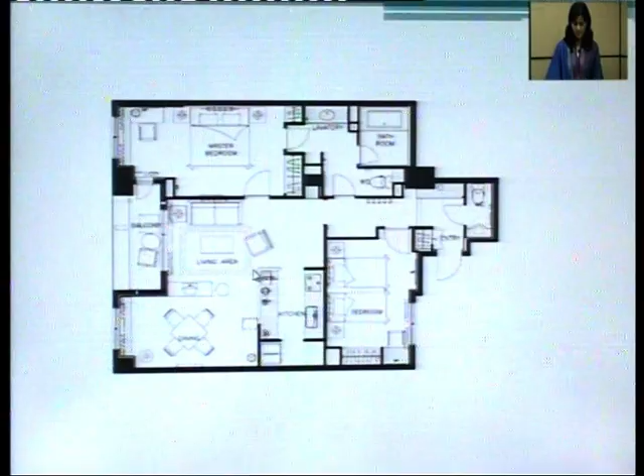Now, planning of a house. A house can be divided into 3 major areas. These areas are the living area, sleeping area, and the service area. For example, if we consider the same plan, this is the main service area, this kitchen and this dining room, and this is the main sleeping area, these 2 bedrooms, and this living area is the main living room.

Now we will discuss the living area. This area is for general use. Hence, the living and drawing room should be planned near the entrance of a house. It should be planned taking into view some considerations. Some considerations are required for the design of a living area.

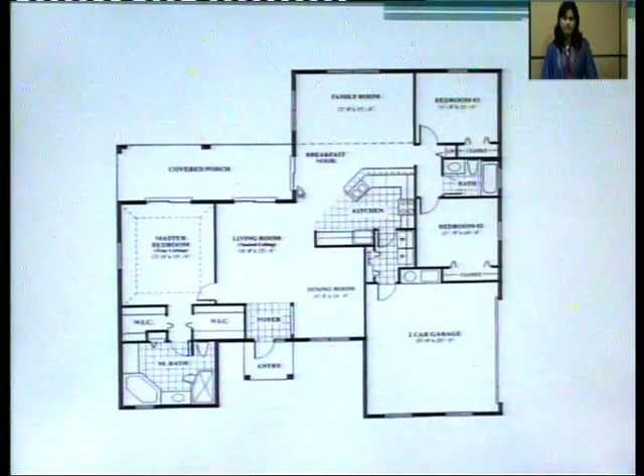Now next comes the sleeping area. This area provides bedrooms for sleeping and relaxing. Bedrooms may be with attached or detached toilets. Their size depends upon the number of beds. If we have to provide a king size bed, then the room size should be comparatively larger, and if a queen size bed is provided, then we can use a smaller bedroom also.

They should be located so as to give privacy to its users. They should have a northwest and southwest aspect. It means these should be provided either in the northwest corner or in the southwest corner of a house. This is a typical bedroom.

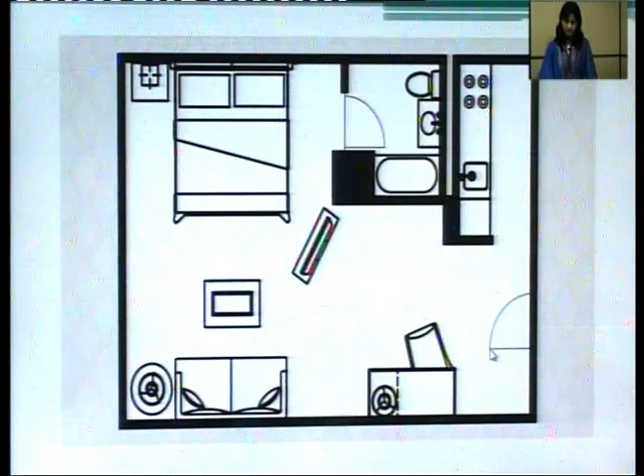Now next comes the service area. Service area includes kitchen, dining area, bathrooms and WCs. All these areas come in the service area.

Kitchen: it may be adjacent to the dining room or may be separate. A dining room can be attached to a kitchen or it can be a separate kitchen. If a separate kitchen is provided, it will have walls and is enclosed, and these days the open kitchen concept is very common, and it should be attached to a dining room so that one counter worktop can act as a breakfast nook for the users.

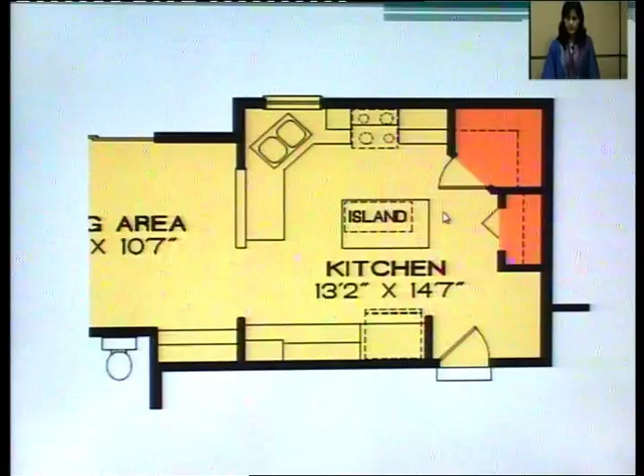Now next comes the bath and WC. Bath and WC should be approachable from all the rooms, meaning they should not be provided either at the front or at the back side. In fact, they should be easily approachable from all the rooms, whether it is a drawing room, dining room, bedroom or any other area. Dados or glazed tiles should be provided on the walls. Dado means the area up to the door level. Here tiles should be provided.

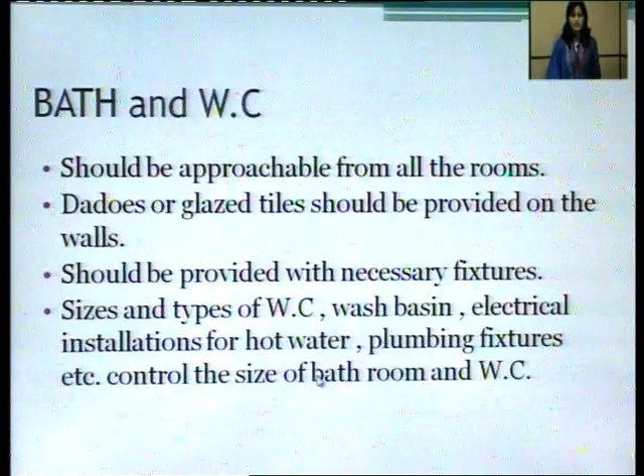Bathrooms should be provided with necessary fixtures: sizes and types of WCs, wash basins, electrical installations for hot water, and plumbing fixtures, which control the size of the bathroom or WC. The size of a toilet depends upon the size and type of WC used, and the wash basin, whether it is counter type or pedestal type; whatever type of wash basin we are using, it affects the size of a bathroom or toilet.

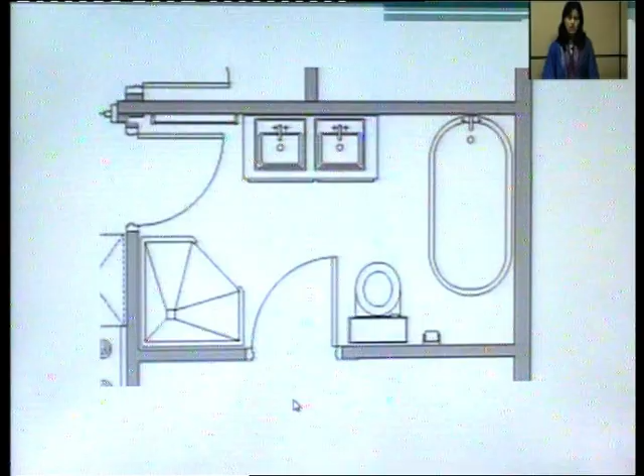If we consider the plan of a toilet, this is the main bathing area, the bathtub is provided over here, and if we segregate it, this comes under the dry toilet area and this is the wet area of the toilet, and this is the steam room which is provided in the nook here. This toilet is attached to two rooms: from this side to the master bedroom and from this side to the lobby area or family room.

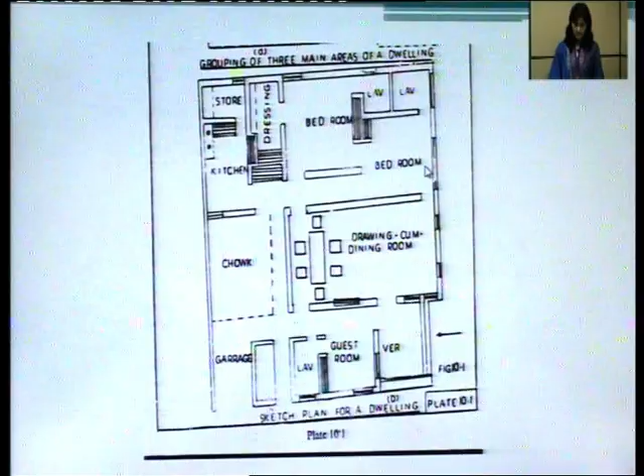If we consider this plan, the main living area is provided by these horizontal lines. As you can see here in the previous plan, this is the drawing cum dining room which comes under this living area, and then the sleeping area where bedrooms are provided. Both bedrooms are provided here, so this area is considered under the sleeping area.

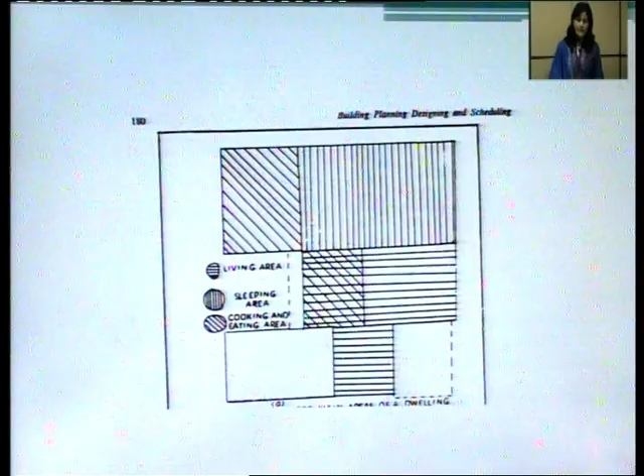Diagonal lines are provided over here. Here the kitchen is provided and here the dining table is provided. So this area acts both as a living area as well as a cooking or eating area, meaning service area. Now, functional planning and circulation.

All the areas are designed taking into consideration the purpose for which each room will be used. The purpose decides the placing and size of windows and furniture, and this is true in the design of all the spaces. All rooms are grouped together by means of a passage, lobby, staircase, etc.

All these areas come under the circulation area. The circulation area should be as small as possible and at the same time well ventilated and lighted. While planning, the architect is supposed to use judgment in fulfilling the needs of the owner with due consideration to economy, rules and regulations, customs, and types of family and their needs.

Now here comes the various areas in a house, meaning all the typical requirements of a particular house. All types of houses, whether it is a farmhouse, a small house, detached house, attached house, or balcony type houses, bungalows, should all have a drawing room, dining room, bedroom, dressing room, toilets, storeroom, and the puja room. Apart from these, various other areas in a house are kitchen, guest room, children's room, staircase, garage, and verandas.

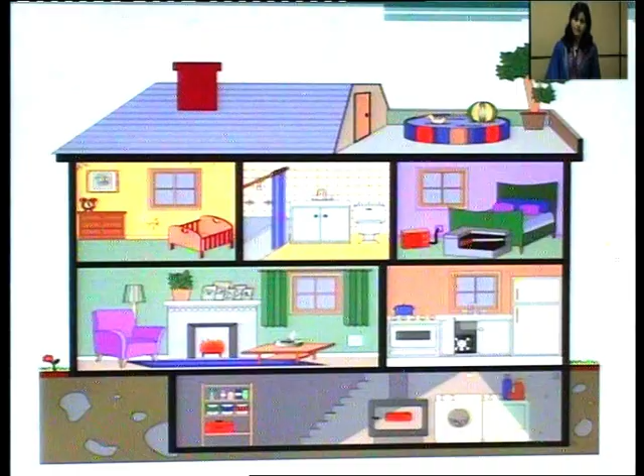Now, requirements of room. A house consists of various rooms for different purposes. The real art in home design is to group all the rooms in such a way that the resulting building provides the most convenient and comfortable experience to its inmates. The occupant must feel convenient, otherwise the house will not be a house. Each and every inch of land is to be used to its best possible advantage.

Now we will come to the various types of houses. These types of houses are detached houses or bungalows, semi-detached houses, then flats or apartment houses, then row houses or chawls, and then skyscrapers. We will discuss these types of houses one by one.

Now first comes the detached houses or bungalow. This is a bungalow and it comes under the category of detached house. Detached house means it doesn't have any common wall. Mostly single storied houses, and these days these can be double storied. Requirement depends upon the size of the family. Then ages of members and their particular needs affect the requirement of the detached house.